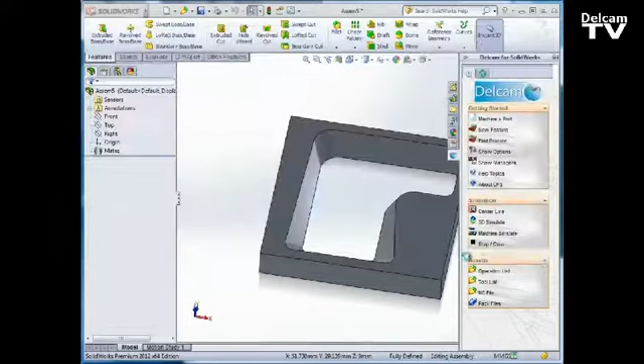Okay, it opens up and the workflow is exactly like a milling file. It wants to know the stock axis, what the stock looks like, and our setup. Those are our initial steps. So the stock axis is good. I still have all of the options for defining it, aligning it, but that's good where it is.

My stock is going to be a bounding box around the part, and it builds that component in my assembly. Okay, you can see the stock component right there. And the setup is good also. I'll leave it where it is.

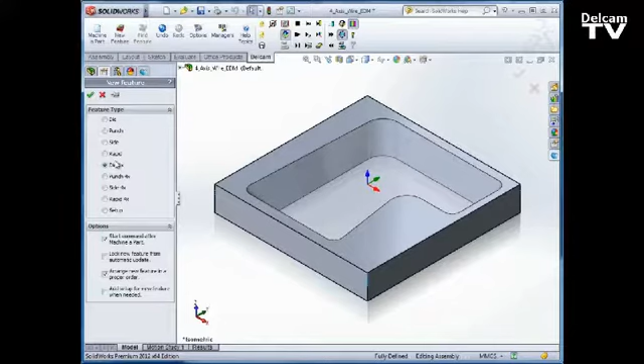Okay, now I can start creating features, and we can see die, punch, side, and rapid. This is 2-axis at the top and 4-axis at the bottom, plus the option for creating more setups. So it's very simple. I'll go with a 4-axis die. I need to select an upper curve and a lower curve, and these are actually sketches. If you have the sketches you need in the original part, by all means you can use those. If not, you can create the sketches right in the assembly and use those.

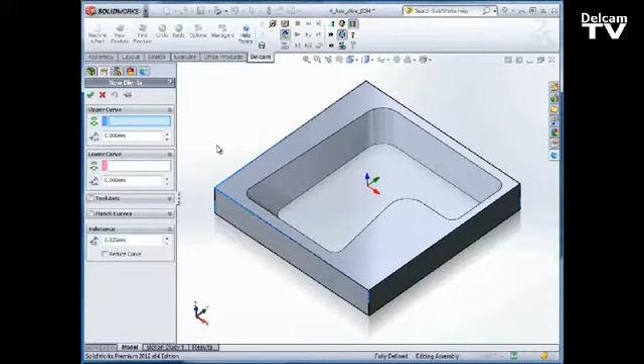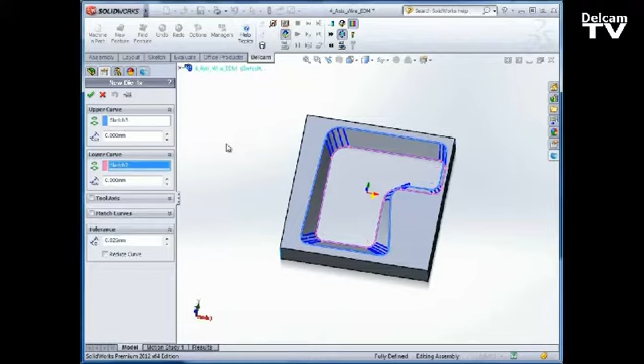I do happen to have them in my model, so I'll drill down through my flyout feature manager, go to this lofted cut, select sketch 3 as my upper curve and sketch 2 as my lower curve, and I get a preview. Okay, let me get rid of the flyout feature manager. The tool axis is correct. You can see the yellow arrow, and now I have this option to match curves.

Now in this case, my ISO lines look very good. They're following the profiles and the faces exactly. But that might not always be the case. If you have some twist, or if you have some distortion in your shape, you can correct it by matching curves. And this is very much like using the connector points when you do a loft in SolidWorks.

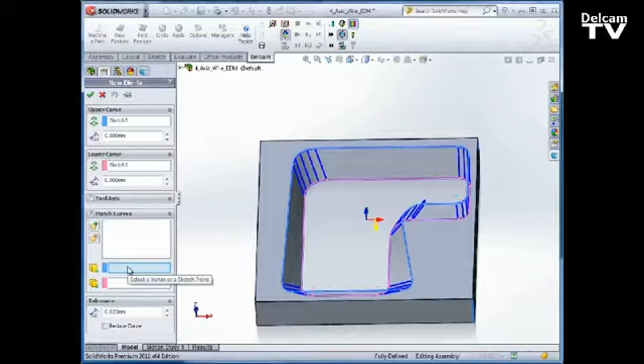So what I need is an upper vertex or sketch point. So I'm going to select this vertex right here, and the lower one likewise, and then add that as a match curve. And again, if you don't have these vertices exactly where you need them, you can create sketches with points and use those points instead.

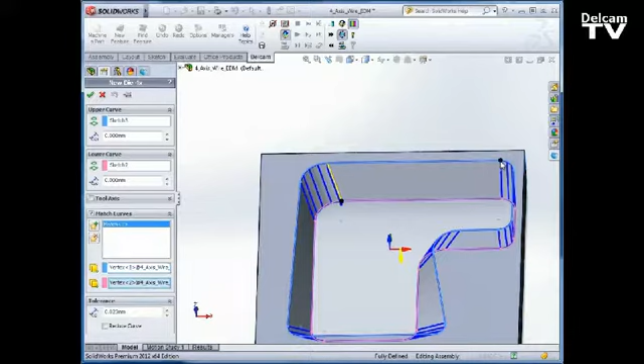Now to show you where this will have a drastic effect on my feature, I'm going to pick one sort of badly here. I'm going to pick this vertex and add that, and you can see the twist that creates in this part. It really does mangle this feature. But we can use it also to correct the features. If you have some twist, if you have some distortion, you can use these matched curves a little better than I did there.

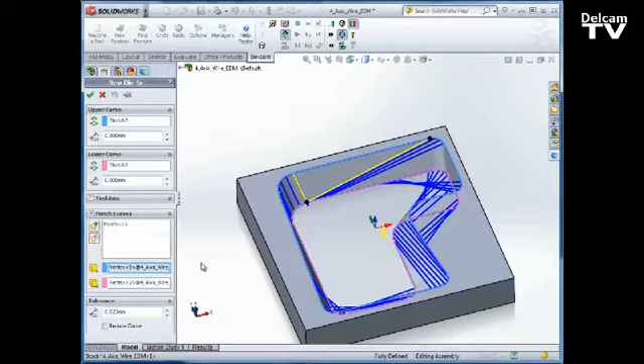I'll get rid of that one. You can see you can go back and correct mistakes. But in reality, we don't need to match curves on this feature. I just wanted to show you how we can do that. So we'll clear everything out and disable that, and we'll accept our feature as is.

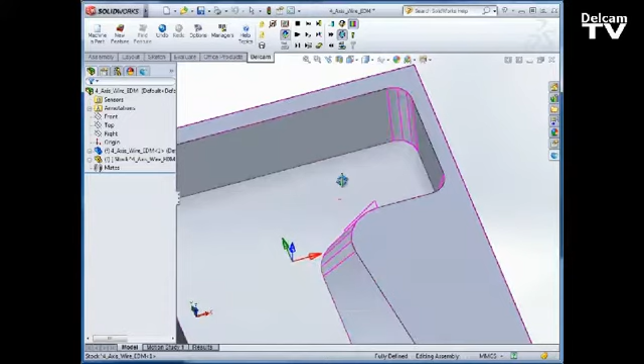Okay, now I'm still not completely satisfied with this feature though, because I don't like the start point. It's at a compound angle, it's in a strange location, so what I would like to do is override this start point location. And what I need to do that is a point. So I'm going to create a quick sketch right here on the fly and put a point right here where I want the start point to be.

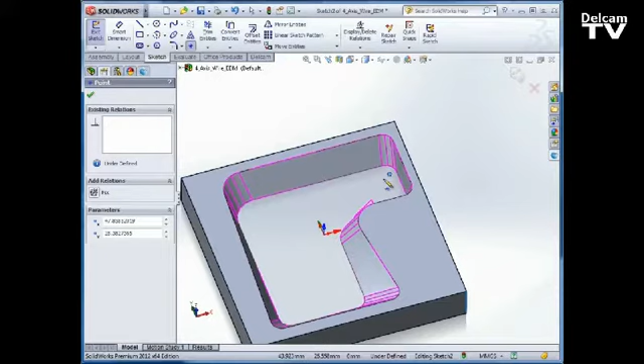Now if you want, you can fully define this with relations and or dimensions. I'm going to just leave that sort of hanging there in space, click OK, and accept my sketch. And there's my point. Okay, now I want to use that as my start point.

I'll go to this die feature, right click, and we have an extra entity here that we don't have in other modules. We have Edit Wire EDM Leads. We have Edit Feature, Edit Attributes, but this is a special one. And I'm going to override the default leads here. So the start point for curve 1, which is my upper curve, is this point right here.

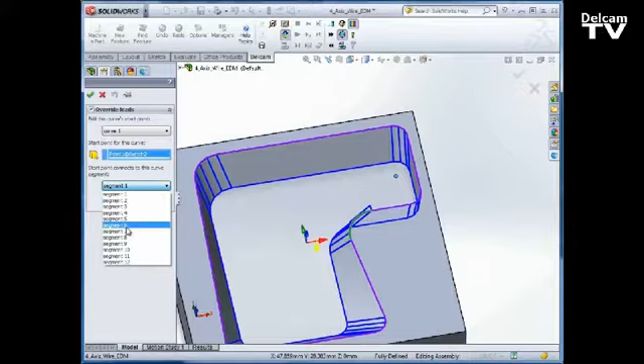And you can see that I've got it selected, but it's going to be connected to the segment of my choice, and you can see this green segment highlighted there. That is not what I want. So I have to go through this list. I see every segment, and it's pretty close to the end. Okay, that's not it. You can see that green there. I need the next one. So segment 10 should do it.

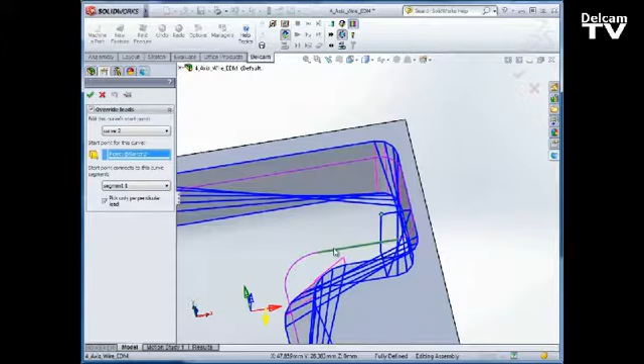Okay, now we still have a lot of distortion because I've only matched the upper curve. Now I need to take care of the lower curve start point. So I'm going to drop this down, go to curve 2, select the same point, but you can see there it's still not looking at the proper segment. And try that one. That's down here in the corner. Okay, segment 3. So it's not always going to be the same segment between the two sketches.

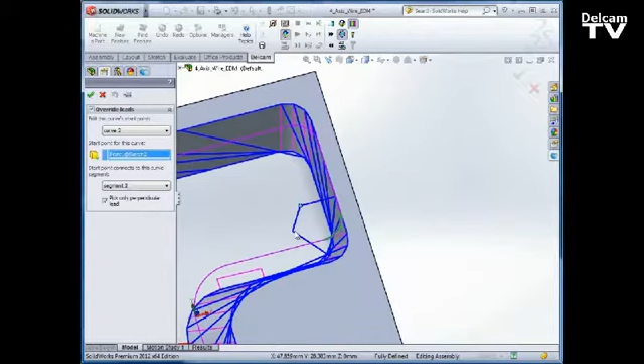Now I just changed it by rolling that around. That's why you see the distortion. I changed that back. Okay, now it looks good. Now one thing I like about not fully defining this point is I can sort of drag it around and adjust my start point manually. It's kind of nice. But once you get it set, it might be a good idea if you fully define that point so it can't move accidentally.

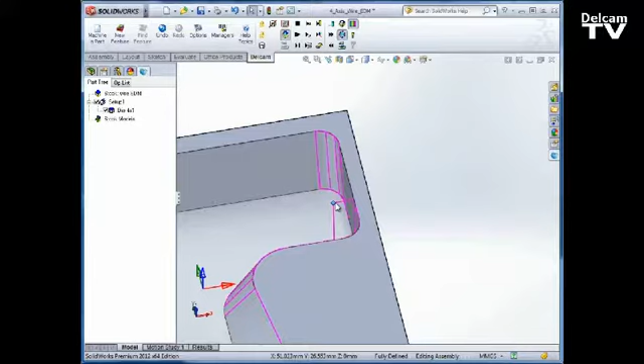Alright, now let's take a quick look at simulation. I'll run simulation here, and you can see the wire started at my start point. It's going through and cutting this die for me. I can also show the heads of the EDM. It's pretty nice. I'll change a couple things about this.

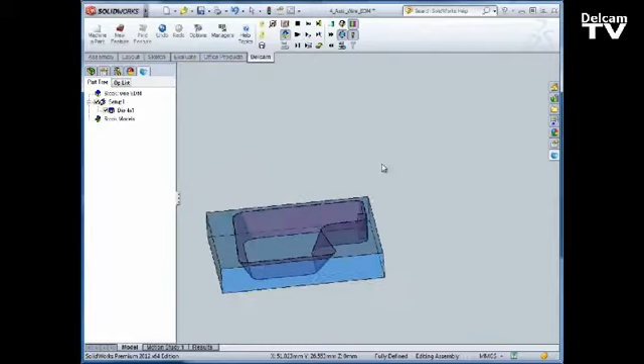I'll stop that, and now I'll go edit the attributes, and here's where I can dictate how this is cut. So if I go to the operation type, you can see that I have a stop operation selected now. We have other options, cut off, contour. I'll do a retract. What that will do is it will leave the tab, and let me go back into the attributes, and I want to set the length of that stop length here. I'm going to set that to 5 millimeters. Okay.

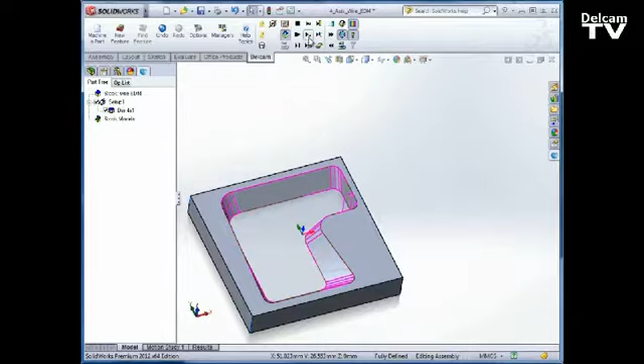I'll turn those heads back off. So you can see the retract happening there. It's leaving the tab. I'll speed it up a little bit. Okay, there it goes. So maybe I do want to add the cutoff and maybe even a contour to this.

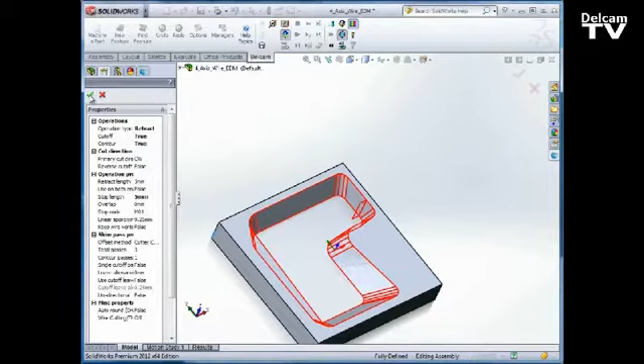So I'll just go back and keep editing, go back to the attributes, set the cutoff to true, and set the contour to true. So I'll get one more finished pass around there. Play to the first operation. This is my retract. Here comes the cutoff, and finally the contour.

So there's your introduction to wire EDM in Delcam for SOLIDWORKS 2012 R2.